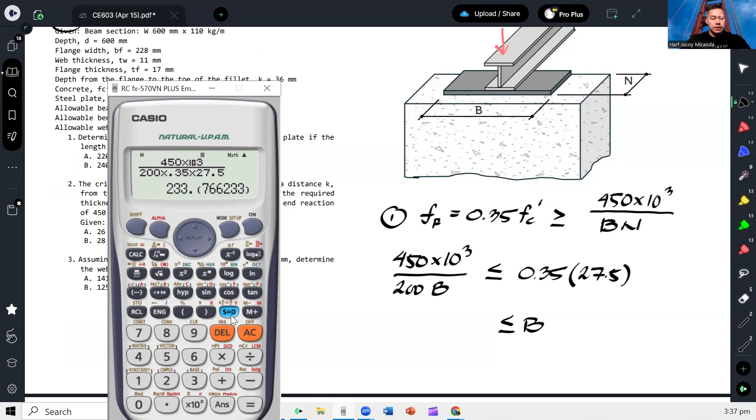And from there we can calculate for B. If we cross multiply, we isolate B. So B would be 450,000 over 200 times 0.35 times 27.5, which gives us 233.77 mm. So to make this clearer, B should be greater than or equal to 233.77, meaning at least 233 is okay. So among our choices, the best answer would be 240, the next higher value. That will be our answer for number 1.

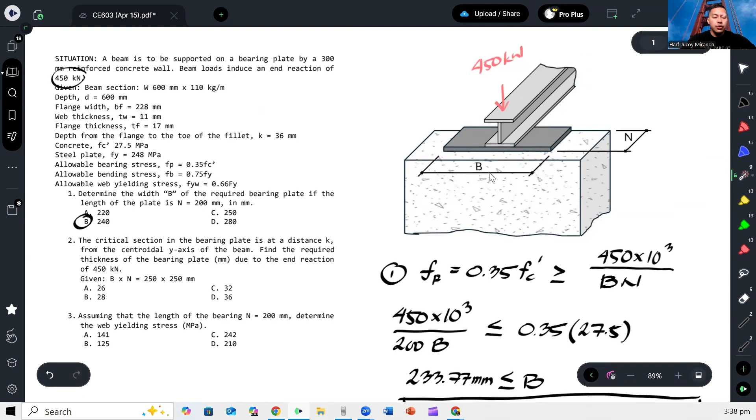So if the bearing plate is large enough, the concrete wall won't be too stressed. Next, number 2: the critical section in the bearing plate is at a distance K from the centroidal y-axis of the beam. Find the required thickness of the bearing plate due to the end reaction. Again, it's not specifically stated what we need to protect, but we're given a dimension, let's say for example 250 by 250 for number 2.

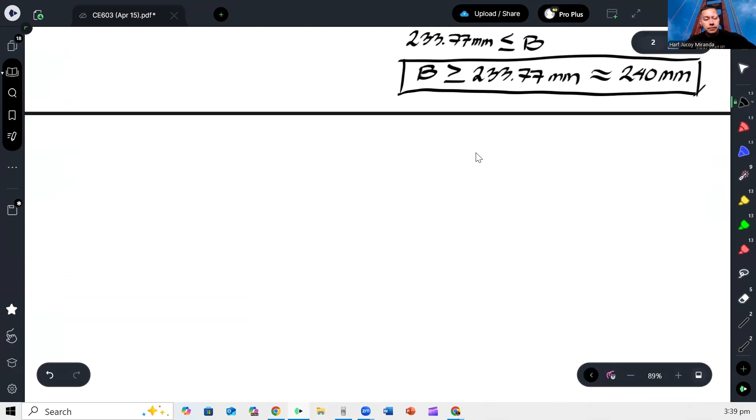So how do we calculate that? What do we do? First, we have to understand that if this is the plate, let's enlarge it a bit, and here is the wide flange.

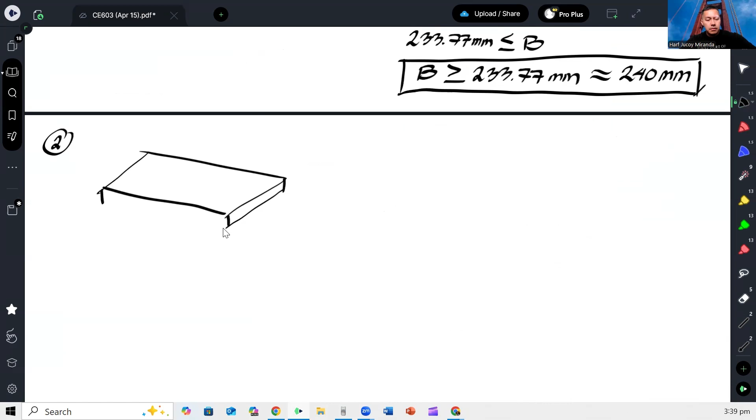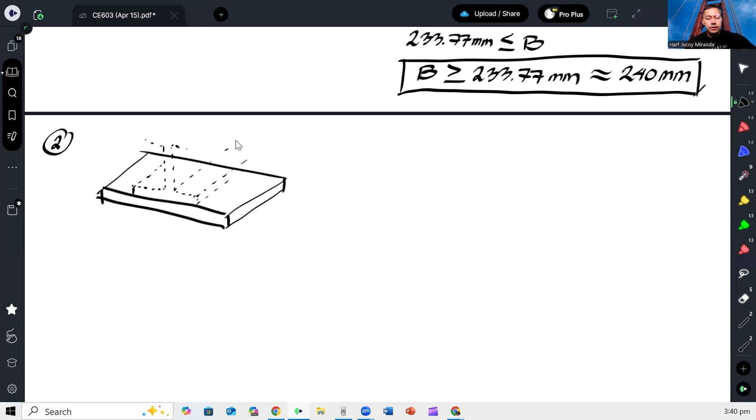Okay, so ang sabi sa atin, meron ditong force na naka-apply. Ayun yung 450. Okay? So dahil sa force na yun, magkakaroon dito ng reaction. May magkakaroon dito ng pressure na reaction.

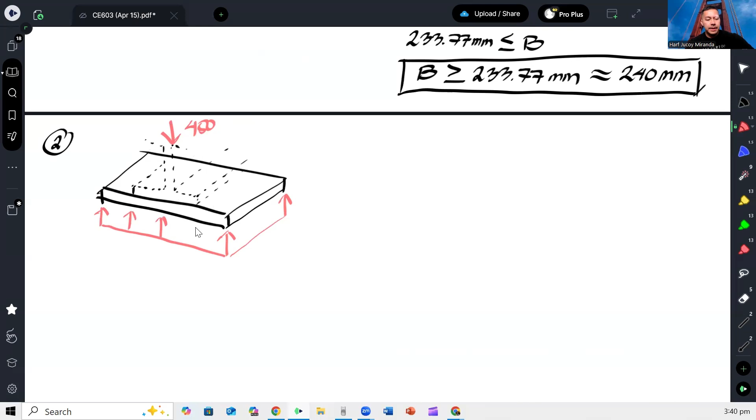Ganyan. So parang sa footing. Okay? So tawagin na lang natin siguro na Q. Yung Q na yan is yung bearing pressure which is equal lang sa 450 divided by yung area, which is yung area natin dito. Sinabi kasi 250 by 250 ito.

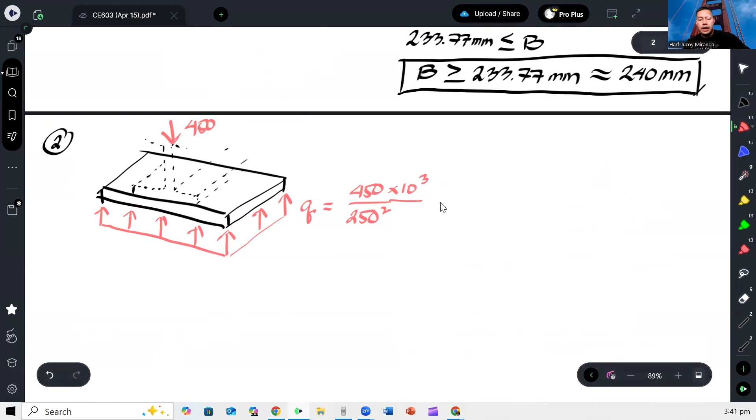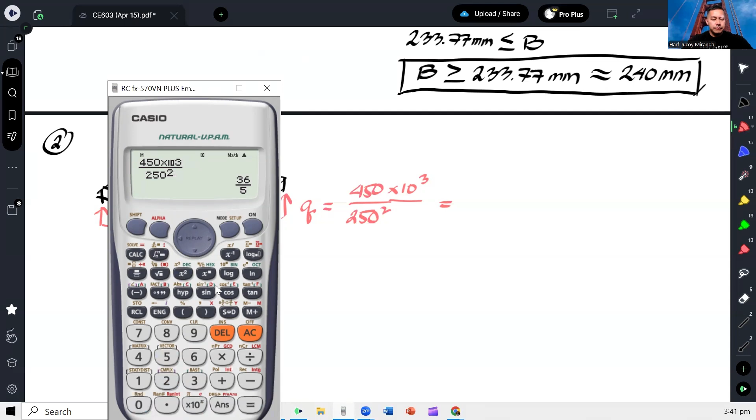So yung area natin is 250 by 250 or 250 squared. Okay? So this in kilonewton. So siguro gawin nating megapascal. Multiply natin ng 1,000. So therefore, our Q would become 450,000 over 250 squared. Okay, and that gives us 7.2. So 7.2 megapascals. Okay? So, again, like I said, magbe-bend ito.

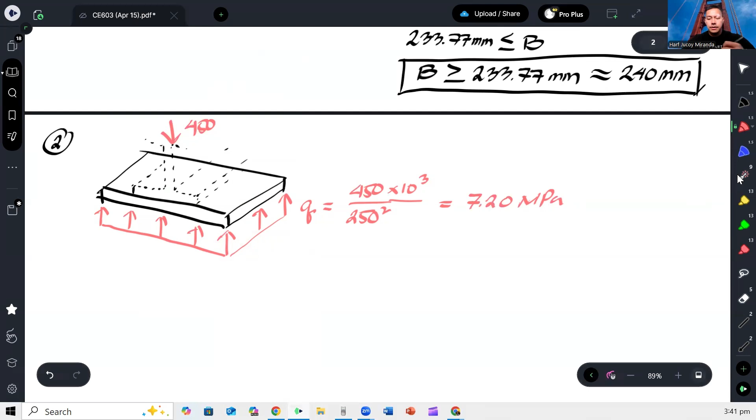Okay? At para makita natin yun, tingnan natin sa front view. Sa front view, parang ito yan. Ito yung wide flange. Ginawa ko lang broken line para ang focus natin kasi yung plate. Ito yung plate.

Exaggerate ko na lang. Kasi ito yung Q natin. Okay? So, what I was saying was, may tendency ito na kapag, dahil dun sa applied force, so may force dito na, okay, dahil doon, pwede siyang mag-bend ng ganito, yung plate. Okay? So, dahil dito sa upward reaction na to. So, saan daw critical yung section for bending of the plate?

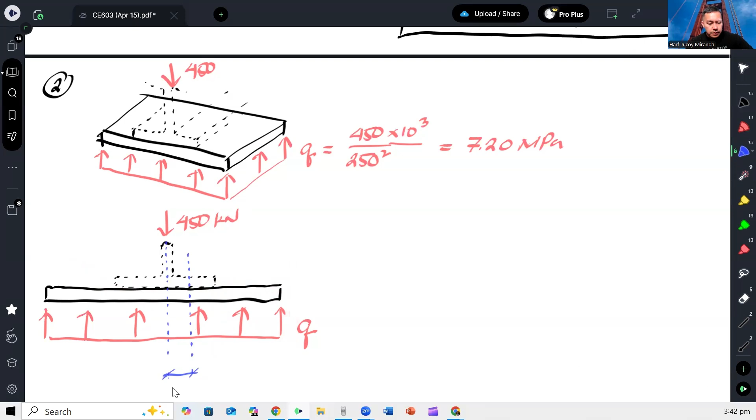So, dun daw sa K distance from the center. So, let's say ito yun. Okay, K distance, which is ang binigay naman yun, property yun ng wide flange, 36 mm. So, kahit hindi sabihin sa atin na dun yung critical section for bending ng plate, dapat din alam natin yun. Hindi siya, kumbaga, nagkataon lang sa problem ko sinabi niya, no?

The critical section in the bearing plate is at the distance K from the centroidal y-axis of the beam. Pero kahit hindi niya sabihin or banggitin yun at binigyan kayo ng K, automatic yun. Dun siya, dyan yung critical section for bending. Okay?

Okay, so what will happen here is that i-analyze natin itong particular plate na ito. So, bali yung plate na yan, like I said, parang footing, ay itutulak siya pataas nung bearing pressure. Tapos, itong critical section na to will serve as parang cantilever or fixed support. Okay? So, this will serve as parang fixed support.

Alright? And then, so bali kung titingnan sa 3D view, parang kunwari, ito yung center. So, ito yung K distance. Ayan. Ayan yung K distance natin, no? So, ibig sabihin, ito yung critical section. Ayan yung critical section for bending.

Okay? Now, also another point is hindi naman natin ina-analyze ito ng buo. Well, pwede naman, kaya lang just to simplify things, ginagawa dyan ay kumukuha lang tayo ng isang strip. Kumukuha lang tayo ng isang strip. Ayan, ito na rin yung strip na i-analyze natin. And normally, ang kinukuha natin na strip is 1 mm yung width. Kung kukuha ka lang na 1 mm yung width. So, ibig sabihin, parang ganito siya.

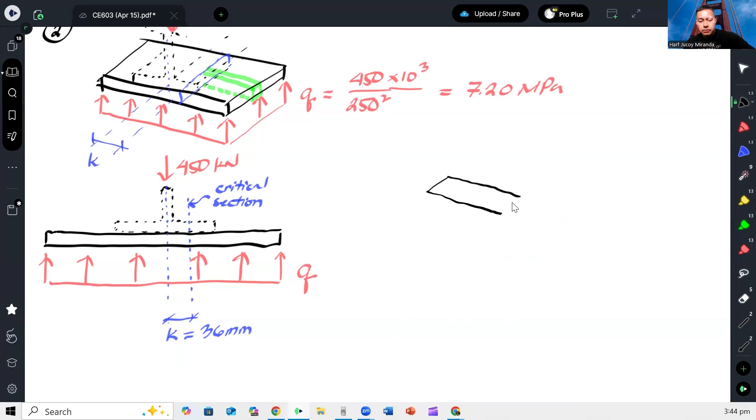Okay, tapos ito, i-assume mo na lang na parang fixed support. Okay? Tapos, andito yung upward bearing pressure. Okay, QU. Tapos, this is 1 mm.

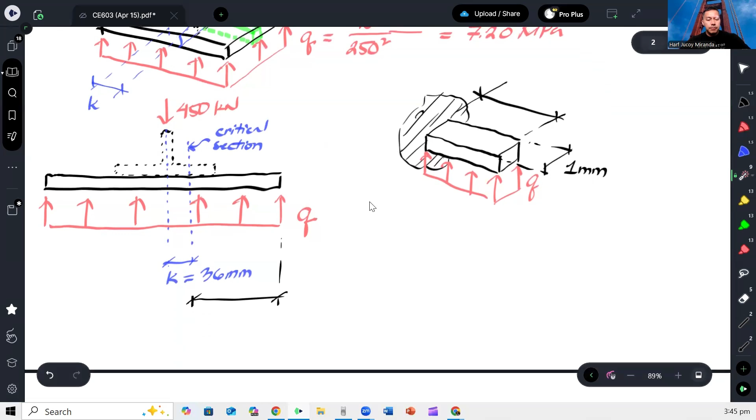Okay? Tapos, kailangan din natin ma-identify ano tong length na to. Ano yung length na yan? So, yung length na yan, bali ito. Okay, which is, hindi ba, itong buong length na to, B. Ito yan B. Ito yan.

So, B yan, no? Yung length na yan. So, ibig sabihin, this is, kung hanggang dito lang, this is going to be B over 2. Tapos, ibabawas natin tong K. So, ibig sabihin, this length is B over 2 minus K. And that is equal to 250 over 2 minus 36. So, 89.

Okay, so ayan na. So, therefore, we can now define yung moment. So, meron ditong moment. Kailangan natin makuha yung moment dito. Okay, M. So, how do we define that moment? So, moment, syempre, mag-moment lang tayo dun sa fixed support. That's going to give us Q, ano man yung Q na yan, times 1 mm para maging uniform load. Tapos times yung length dito, which is 89.

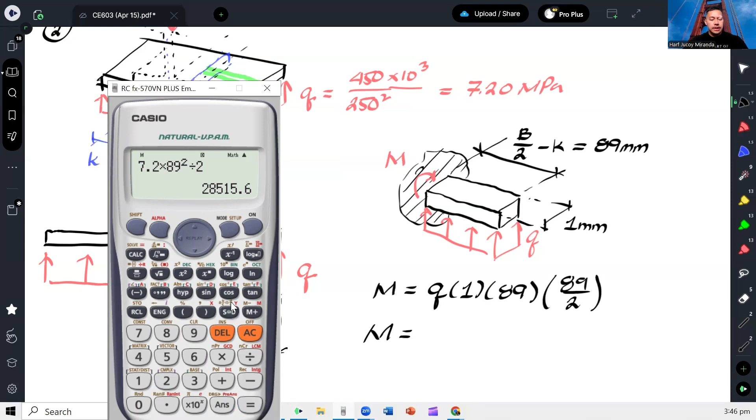Okay, tapos don't forget moment arm, so half ng 89. Ayan. Okay, so our moment, the critical moment on the plate would be, ano yung M? Q. So 7.2 times 1 times 89 squared over 2. So that gives us 28,515.6. The units is Newton millimeter.

Kasi ano to megapascal yung Q. Okay? Tapos mm ito parehas. So yun yung critical moment. So ngayon, how do I design yung thickness nito?

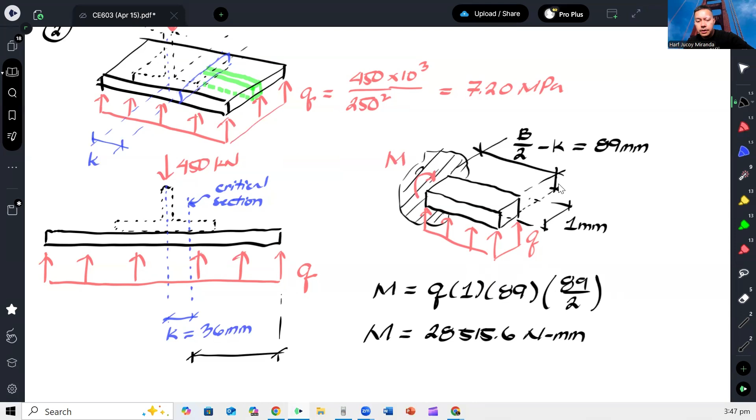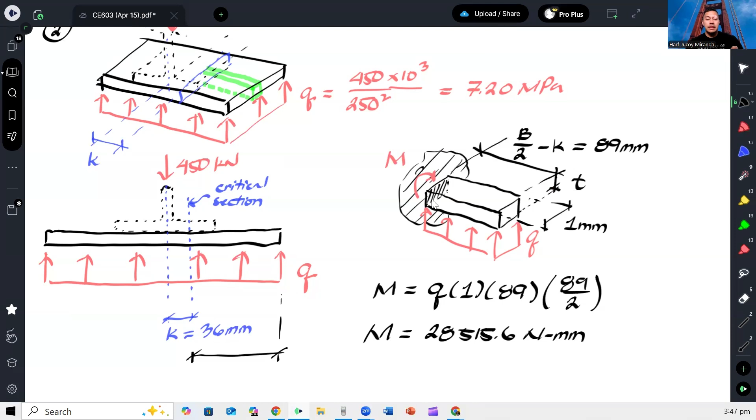So para lang siyang beam. Bali kung gusto mo namang malaman yung thickness na to, no? T. So bali titingnan mo tong cross section na to. Yung cross section na yan. Okay, yung cross section na yan is subject sa bending moment na 28,515.6. O di ba paano ka mag-compute ng bending stress? Di ba MC over I.

So ganun lang. So using MC over I, so bali dapat yung actual bending stress in the plate, bending ay hindi dapat lalagpas dun sa allowable.

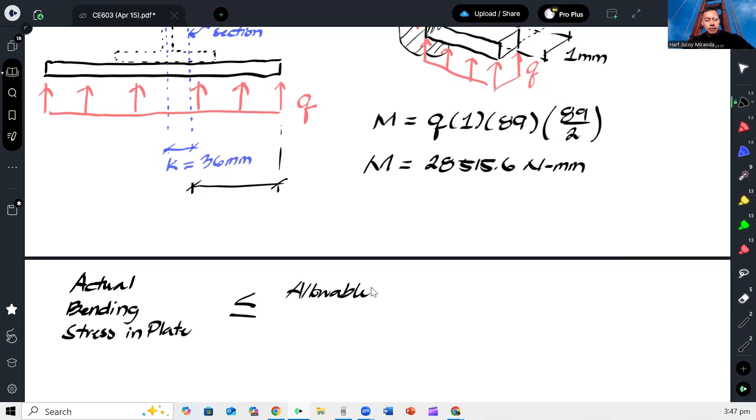Okay, so ano ba ang allowable? Sabi sa problem, it's actually 0.75 of Fy. Ano ba ang actual? O di MC over I.

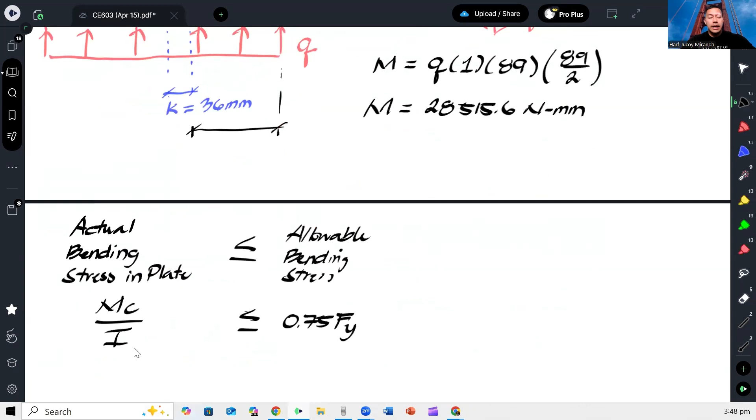Okay, ano yung M? O di ito, 28,515.6 Newton millimeter na yan, no need to convert. Tapos ano ang C? So dahil ito ay rectangular section, parang ganito lang yung section na yan. Ayan lang. Diba? Okay, so ito yung base mo, 1 mm. Tapos yung height mo, yung thickness.

O di yung C mo, kalahati ng thickness. Ito kasi yung neutral axis. Ito yung C natin. Okay, so T over 2. T over 2 over I.

Ano naman yung I? So gano'n ulit, rectangular. BH cube over 12. In this case, yung B natin 1, yung H natin is T. So 1 times T cube over 12. That should not exceed 0.75 of Fy. So the given Fy for the plate is 248 megapascals.

Okay, so therefore we can solve for T. Mangyayari dyan, magka-cancel itong T na to. Magiging T squared na lang yan. Kaya tapos, i-cross multiply mo dito yung T. Let's divide mo to sa kabila. So, therefore, we have

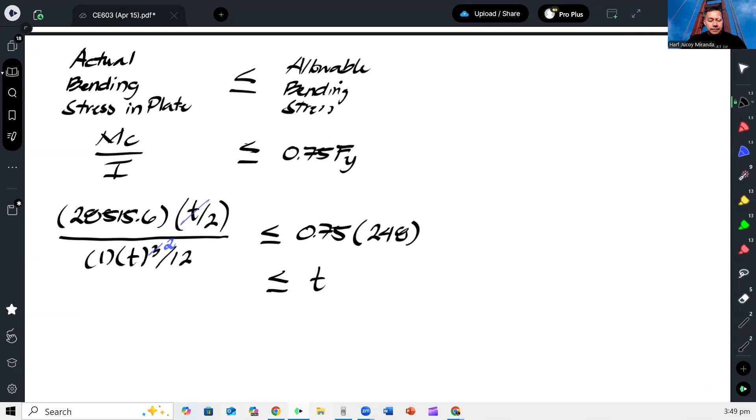over 12. Okay, tapos, may squared to, no? So, square root pa natin. Okay, so 30, no? 30.33.

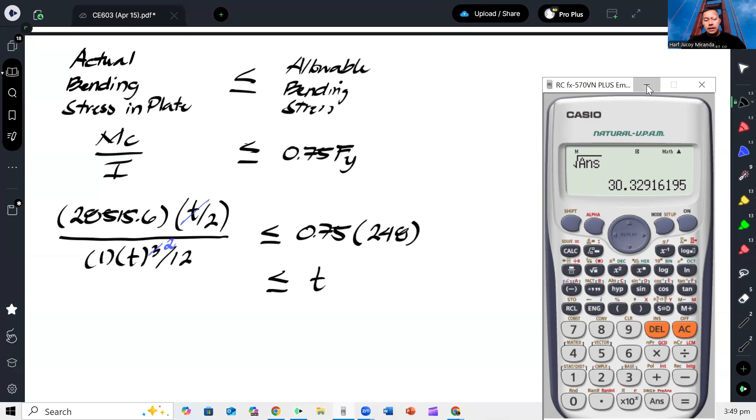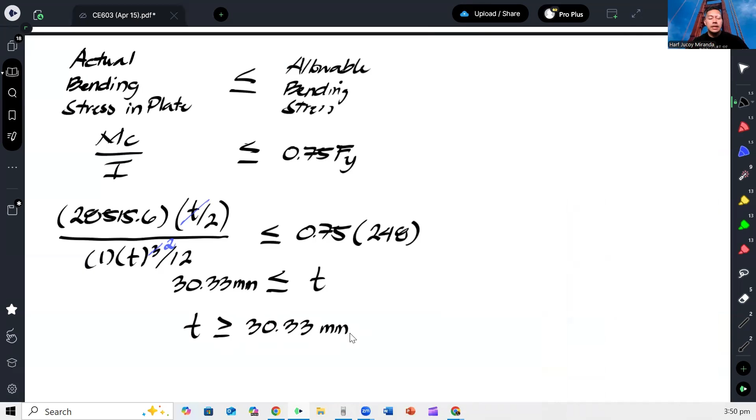Okay, so para lang mas malinaw, balik rin natin. So, T should be at least, no? May ibig sabihin ng greater than or equal, at least 30.33 so that the allowable bending stress will not be exceeded. So, tingin tayo sa choices. Sa choices, the best answer would be the next higher, which is 32. Okay, so 32 is already adequate, no? So, ibig sabihin, we can choose 32 mm.

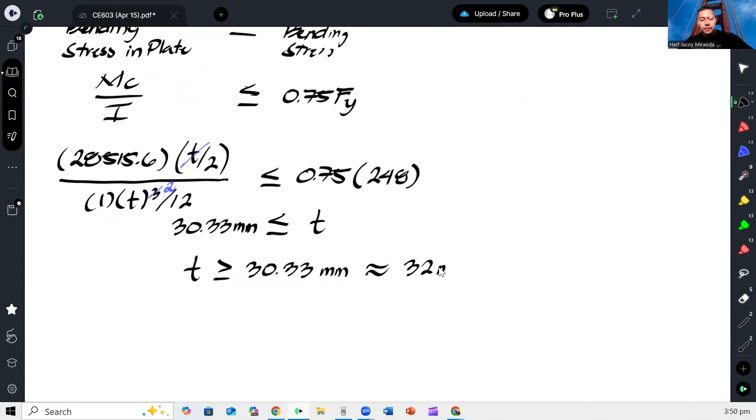So, ganyan mag-design ng bearing plate. Okay?

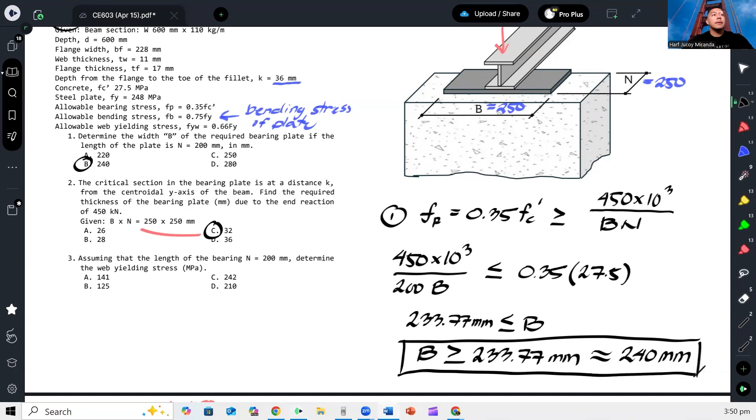Next, assuming that the length of the bearing is 200 millimeters, determine the web yielding stress. So, tinatanong naman dito, ano yung web yielding stress? So, ano nga ulit yung web yielding? So, siguro kuha lang ako ng another figure. Okay, so, bali ang tinatanong nyo, no, web yielding stress. So, number 3.

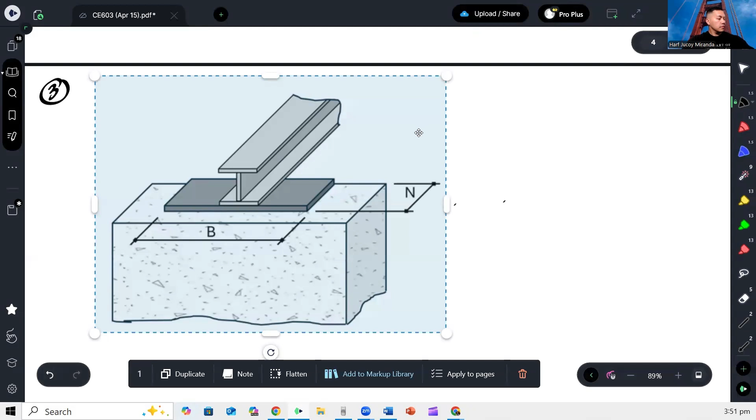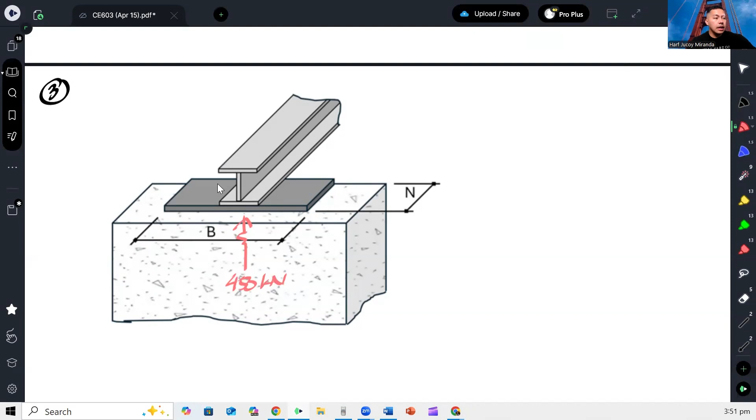So, ang idea ng web yielding ay ganito. So, alam natin na meron ditong reaction, ano? So, may reaction sa ibabaw or rather, pwede natin baliktarin, no? Pwede natin ilagay dito yung reaction para lang ipakita kung ano ba yung gustong ipa-calculate. So, kunyari, ito yung reaction natin. Resultant natin dyan is yung 450 pa rin.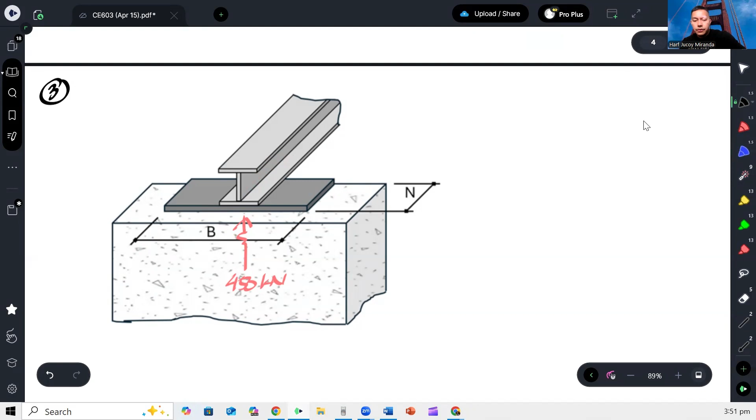Okay, tapos, yielding, meaning sa web, meaning nandito yon. Okay, if that's the web, no? Hindi ini-specify sa problem saan yung critical section for web yielding. Pero dapat alam natin yon from steel design. Ganito po, kapag tumingin tayo sa side view, makikita natin. Ito yung web sa ibabaw, ito yung web sa ilalim. Tapos ito yung base plate. Ayan. Tapos ito yung concrete pedestal.

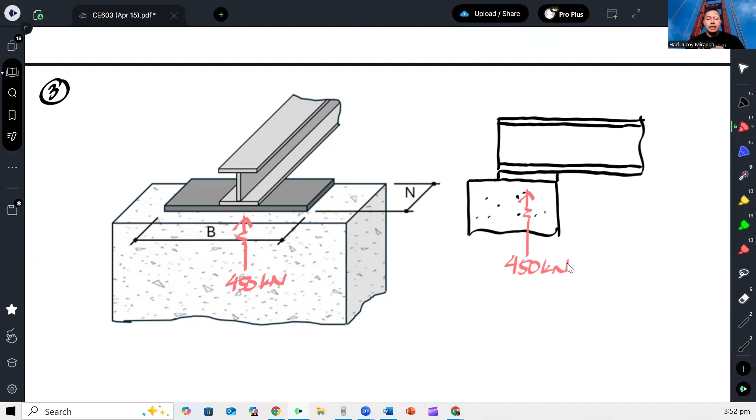Okay, so ito yung concrete. So, bali nandito yung reaction na 450 kilonewtons. Okay? So, unang-unang kailangan nating tandaan, ang critical section for web yielding is at the K distance above or below the flange.

Depende kung nasa ang side yung plate. So, in this case, nasa ilalim. So, ibig sabihin, nasa K distance mula sa ilalim, let's say, exaggerate ko lang let's say, nandito, ito yung K distance. So, dito, critical yung web yielding. No? So, somewhere dito. Okay?

So, tapos another point that we have to understand is that kapag ka na-stress yung web, okay? Yung stress ng web is dito, ano siya, ito yung contact area. Kumbaga, ito yung area na na-stress kapag nasa pinakailalim. Pero as you go farther from the load, no, ang nangyayari daw, yung area na kung saan na-stress yung web ay nagdi-disperse or lumalaki. And lumalaki daw, so ibig sabihin parang gumaganto, no? Ayan, gumaganyan, no? Lumalaki. Okay?

So, and then at eventually, pagdating doon sa K distance, ito na ngayon yung bearing or yielding area. Okay? Bali, ito. Ayan. Yan yung yielding area.

Okay? Ang tatandaan natin dito is that yung slope nito, although minsan sinasabi naman yan, tsaka nasa NSCP naman to, ang tatandaan natin ay yung slope na yan ay palaging 1 vertical, 2.5 horizontal. Okay? Or another way of saying it is 5 horizontal, 2 vertical. No? Yung slope nito. Maganda siya.

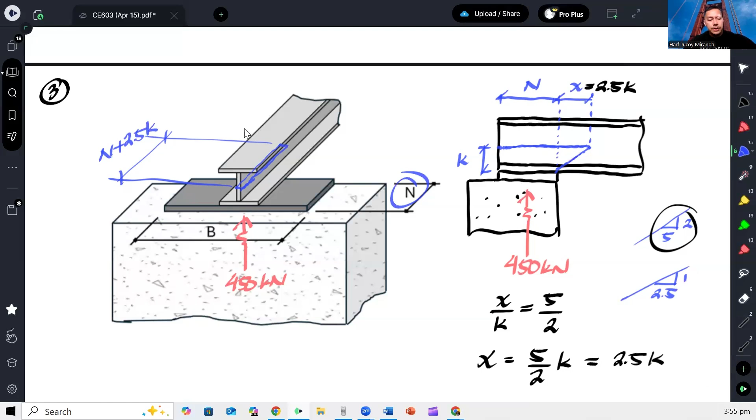Kaya ang nangyayari ngayon, yung length nito, yung length niyan ay nagiging N plus 2.5k. Tapos, yung width dito is basically yung thickness lang ng web. Kaya ito ngayon yung area for web yielding. Yan yung area for web yielding, na kung saan kapag pinutol natin yan, para lang makita nyo, parang ito na siya.

Okay, so bali, because of the applied force sa ilalim na reaction, 450, ito ngayon ay may stress. Okay, so yun yung stress natin sa web. FV, FYW. Yielding stress sa web.

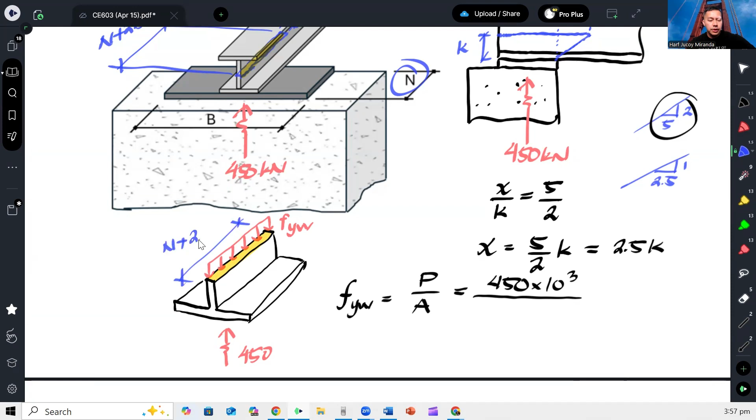Okay, and how do you compute that? Well, dahil stress yan, that is equal to force over area. Ano yung force? E di kung ano in-apply natin, 450, gawin nating Newton para maging megapascal yung sagot. Tapos ano yung area? Bali, yung area nito. So, what is the area of that? E di yung length dito, which is N plus 2.5k, times ito, which is yung thickness ng web.

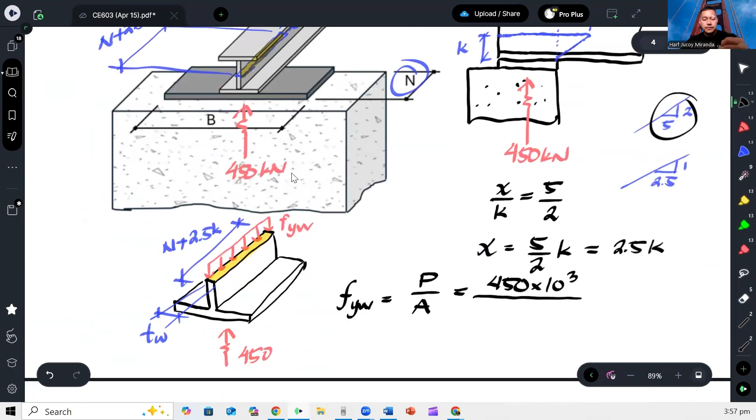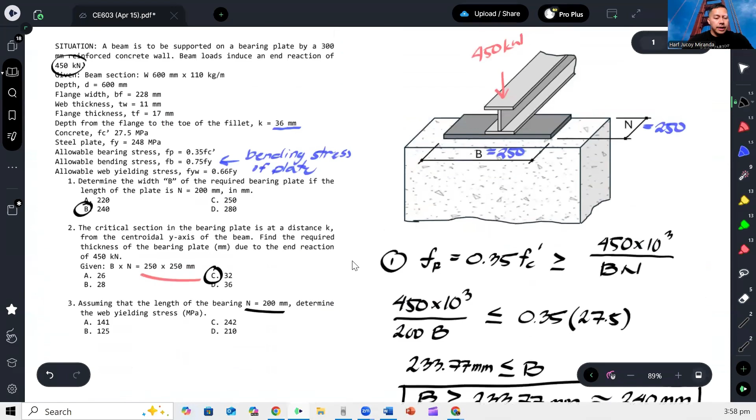So, ang N natin sa problem na to, sa number 3, ang N natin ay 200. So 200 plus 2.5 ng k. Ano yung k natin? The given k is 36 mm. Tapos times thickness of the web. So, ang thickness ng web naman, we are now referring to the wide flange. Thickness ng web is 11. Okay, and that would be our web yielding stress.

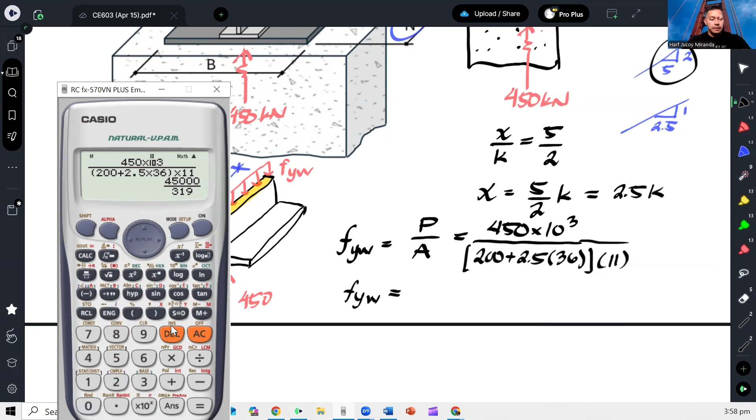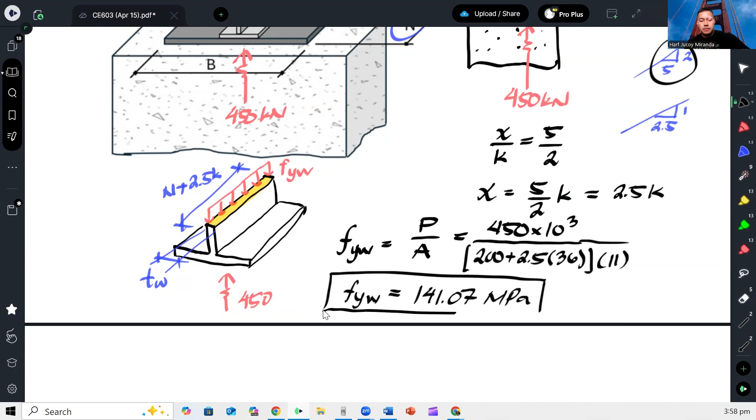And that is 450,000 newtons over 200 plus 2.5 times K times 11. So that is 141.07 megapascals. Okay, and therefore, for number 3, our answer would be letter A.

Okay? So, gusto ko lang ipakita, sir, hindi natin ito nagamit, yung sabi, allowable web yielding stress. Well, pwede natin gamitin, pero hindi naman kasi tinatanong. Pero pwede natin ma-evaluate if the web of this wide flange is adequate. So, kumpitin lang natin yung allowable web yielding stress.

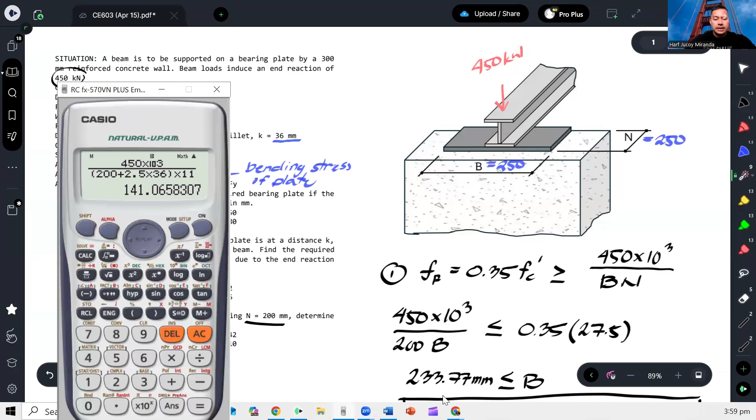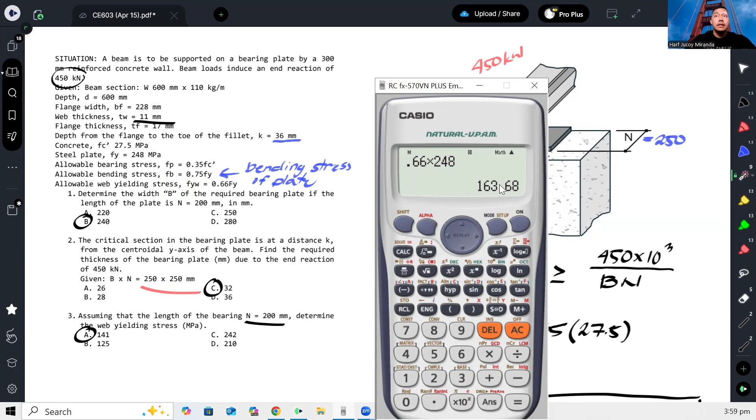That is 0.66 of Fy. Ang Fy natin ay 248. So, ito yung allowable, it is actually 163. Ito yung actual, yung 141. Ito yung allowable, 163. So, ibig sabihin, safe yung web natin for yielding, dahil mas malaki naman yung allowable compared dun sa actual stress.

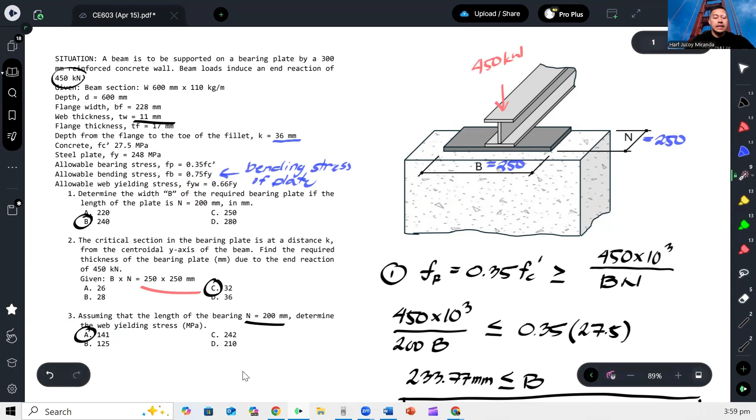Okay? So, ang pinagkaiba lang nito sa NSCP 2015 na provision sa LRFD at ASD ay doon ang kinocompute natin madalas hindi stress, kundi yung strength or yung force. Kaya nga diba sa LRFD or ASD, okay, siya nakaganto, RN, nominal strength, which is Fy ng web times N plus 2.5K times thickness ng web.

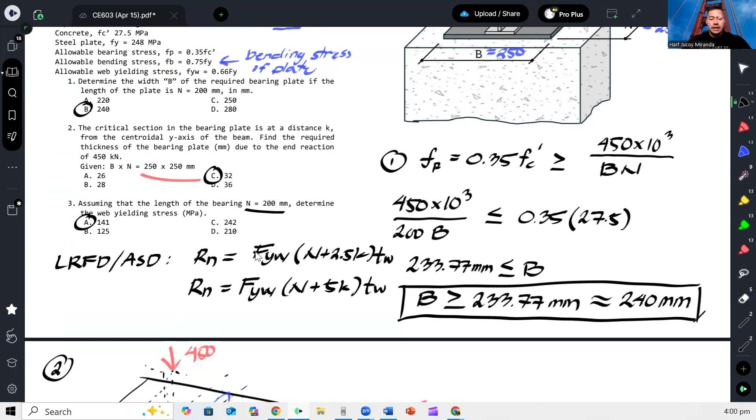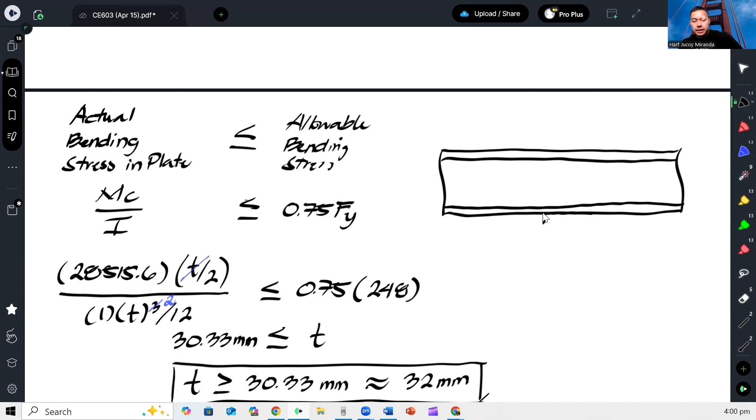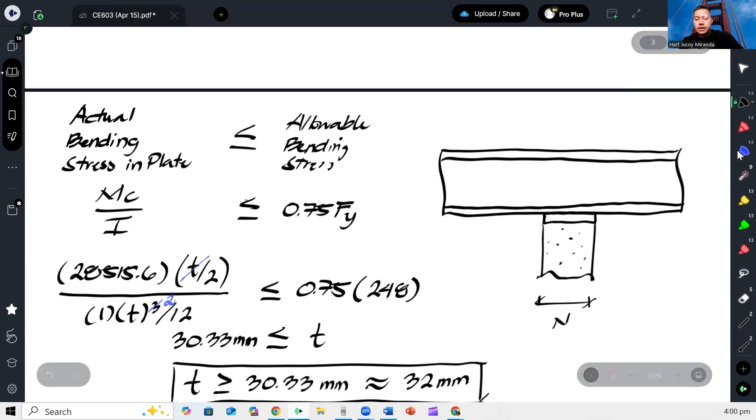Kapag nasa edge, kapag nasa gitna, Fy ng web is N plus 5K kapag nasa gitna yung bearing plate. Kasi pag nasa gitna yung bearing plate, halimbawa dito, ito na lang. Lumalabas ko, halimbawa, nandito yung bearing plate. Yan. Okay, tas N ito. Pagka kinonsider natin yung critical section for web yielding, sabi na nga natin, nasa K distance yun.

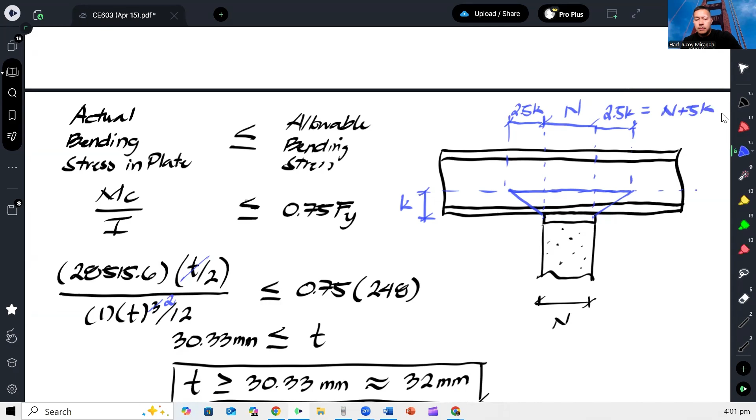Okay, so ito, magkakaroon dito ng 5 horizontal, 2 vertical na transitions or slope. Kaya ito yung magiging length ng bearing area. At kung titignan natin yan, itong gitna ay N. Ito magkabilang dulo, 2.5K. Ito rin, 2.5K. Kaya ang total niya, N plus 5K. Okay, kaya sa provision, N plus 5K yun.

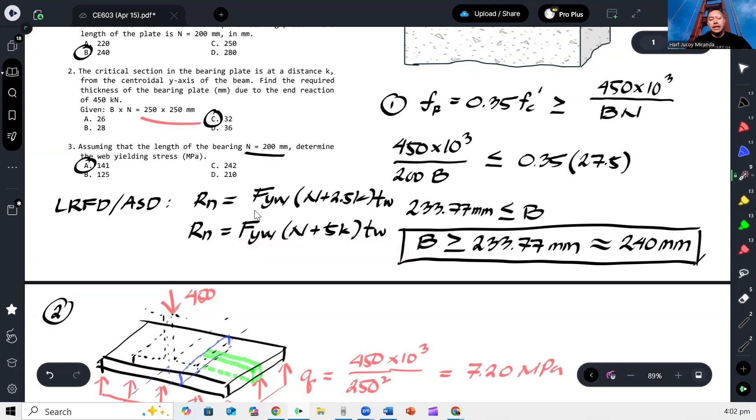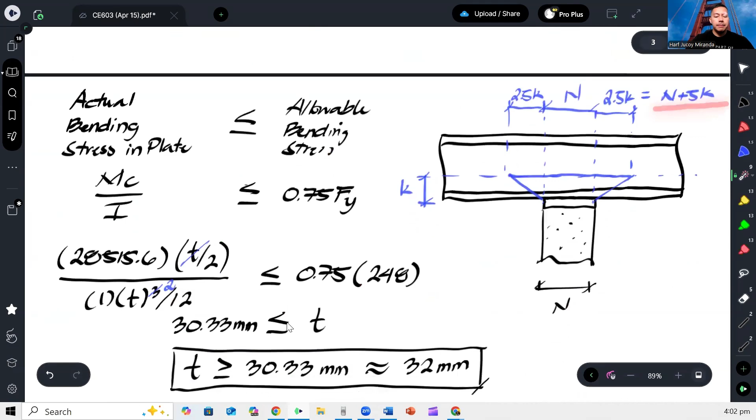Okay, kapag malayo yung bearing plate sa dulo, sa end, actually, ang provision dyan, kapag yung distance niya from the edge ay greater than D ng web, ito yon. Kapag naman less than D, ito yon. Pero dito klaro naman na nasa dulo tayo. Kaya kung alam mo yung concept, you would be able to identify kung ano ang tamang gagamitin, N plus 5K ba or N plus 2.5K. Alright, so that's how we answer this problem.